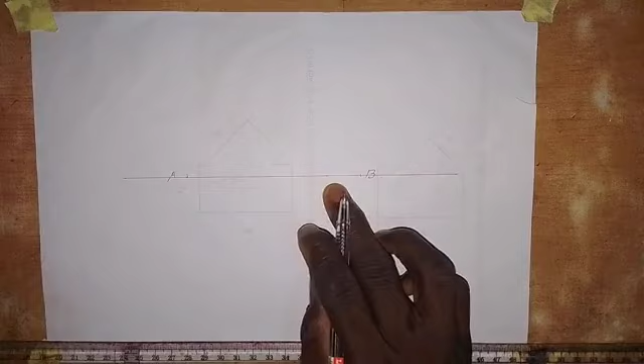So on this horizontal line, we are going to take a measurement of 105 millimeters. Okay, so this is 0.0, and then moving away, we have 105 millimeters here, which is also the same as 10.5 centimeters. So I'm going to label this point as point A on the line, and then label this point as point B on the line. So AB, 105 millimeters, is the diameter of the circle in which we are going to inscribe a heptagon or a seven-sided polygon.

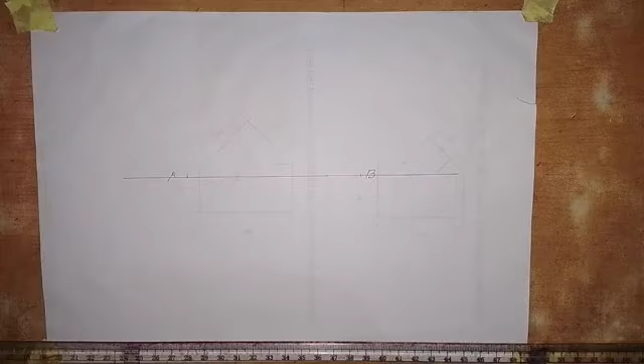Now the next thing that we are going to do is to look for the midpoint of this line AB, that is its middle point, because this line has an odd length, because the length is 105 millimeters. So to locate its midpoint, what we have to do is to bisect this line. So to bisect, we are dividing it into two equal parts.

Put the pinpoint of the compass here at point A and extend the pen point to a convenient radius more than half of the line to draw an arc up, and you draw an arc down like this. Okay, so with the same radius, pinpoint at point B, draw an arc up, and you draw an arc down.

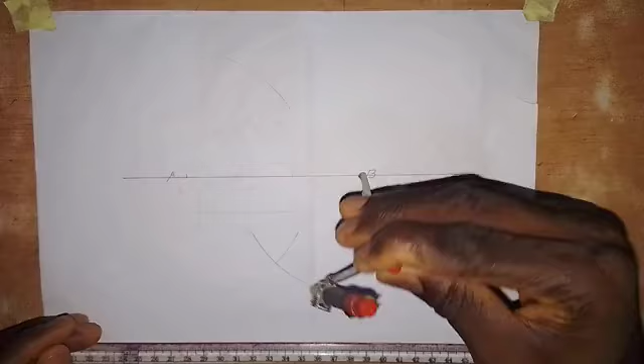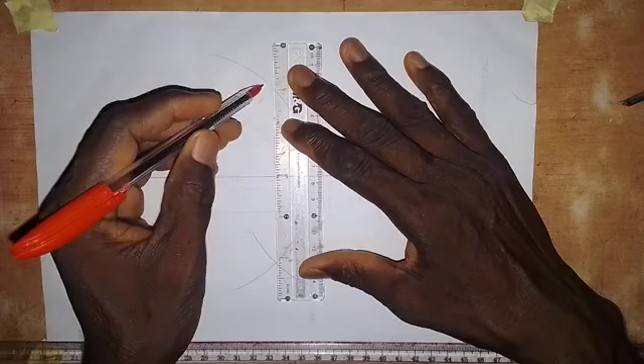All right, so now the next thing that you are going to do is to draw the bisector of line AB by joining the points of intersection of the arcs together with a straight line, and it goes like this. Just set your ruler like this and then draw this line. Okay, you have it like this. All right, so this is the bisector of the line. So let's call this point O here. So that is the midpoint of the line.

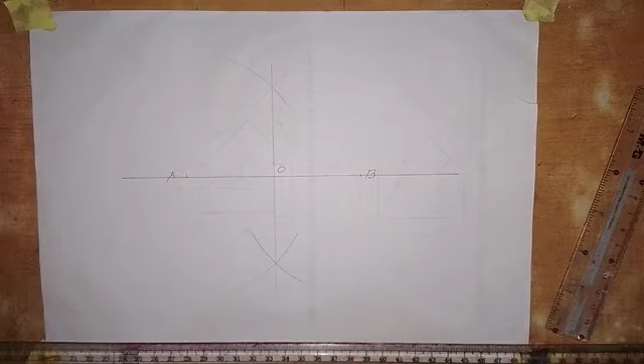Then the next thing that we are going to do is to draw the circle, now that we know the midpoint of the diameter of the circle, which is 105 millimeters. Okay, so we put the pinpoint here at point O, and then we extend the pen point to point B, and then we are going to draw the circle. It means the radius of the circle is OA or OB. Then draw the circle like this. Okay, so here we have the circle in place.

All right, so having drawn the circle, we are going to divide the diameter of the circle into 7 equal parts because we are constructing a heptagon. We are going to divide the diameter of the circle into 7 equal parts. So how do we do that?

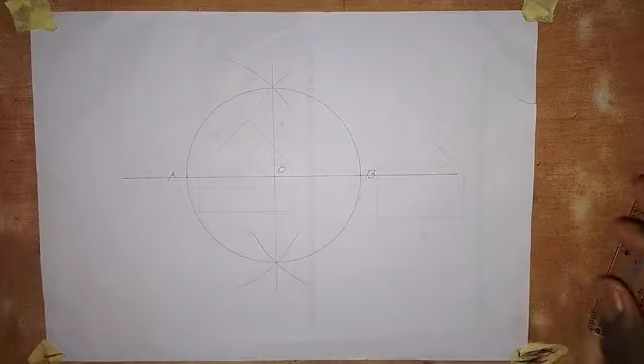So take your ruler and then set the ruler in this form, making an angle of 30 or a bit more than 30 degrees to the line. So from point A here, draw a line in this direction. Okay, so this line, I will call it line AC. So this is line AC.

Okay, then on this line AC, we are going to make 7 equal points on this line AC, so that we can divide this line AB into 7 equal parts.

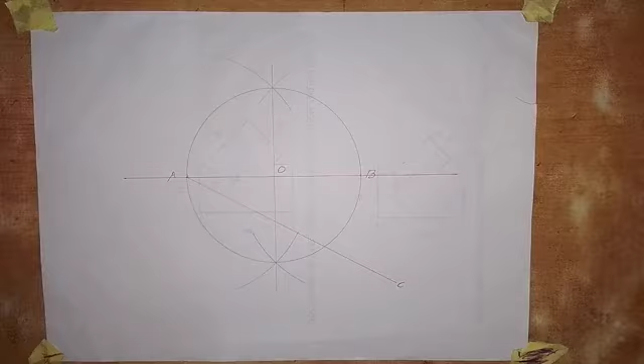Okay, so let's go and divide this line into 7 equal parts. I'm going to make use of this ruler, and I'll be taking a length of 15 millimeters each. You can decide on the length to take on your own. So you choose the length to use by yourself. So this is 15 millimeters here.

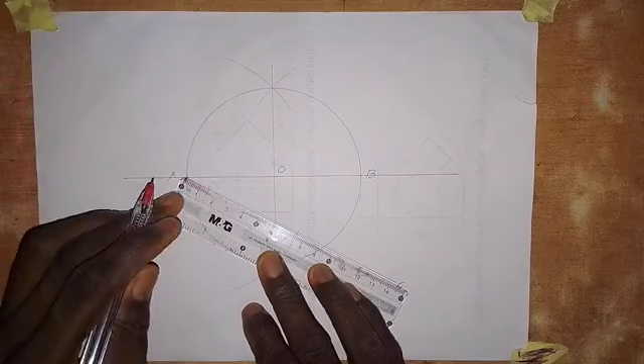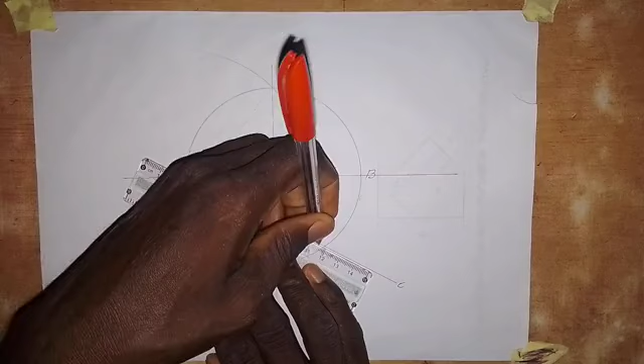Part of this ruler has been peeled off, so I'll just shift it here. And I will take 15 millimeters from here again. This is 1. Then I'll be taking the second one. This is 2, then this is 3, then this is 4, then here is 5, then here we have 6, then the last one, we have 7. So we have 7 equal points on this line.

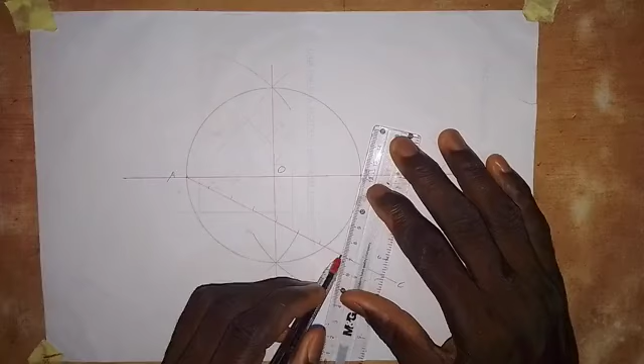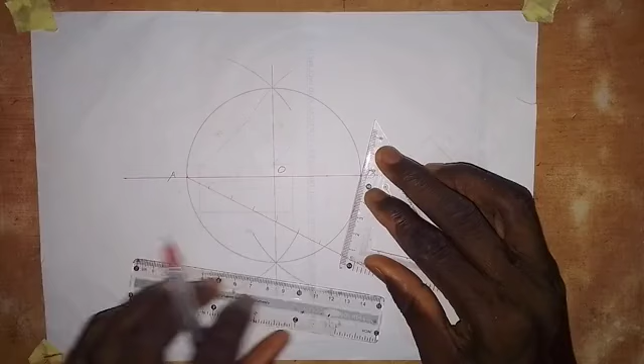So the next thing that we are going to do is that the last one here, we join it with point B, and it goes like this. So you join it with point B, then take your set square, set the set square along this line that connects the last point and B together. I'll put the ruler under it, then shift the set square to the next point without the ruler being shifted, only the set square moves.

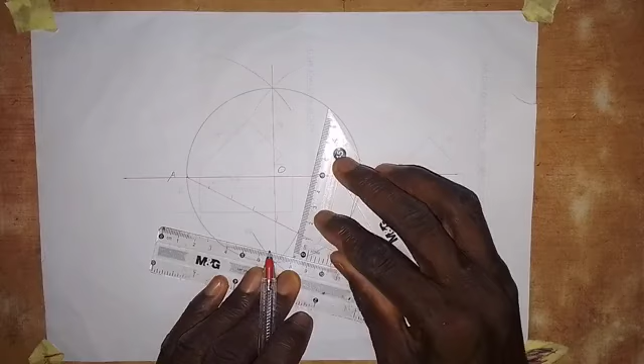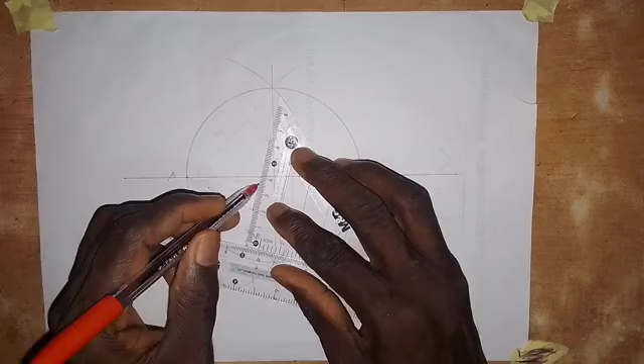So draw the line from here, then shift the set square to the next point again, then draw this line. Then again, shift the set square to the next point while the ruler remains unmoved. Then shift the set square to the next point again. Draw this line, next move the set square to the next point, draw this line, and lastly move the set square to the last point here and draw the line. So we have this.

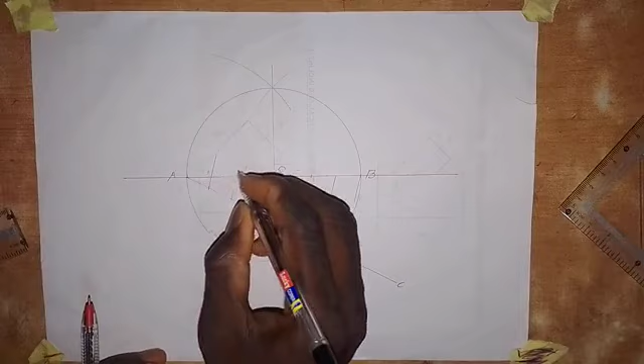All right, so we have divided this line AB into 7 equal parts. These lines here are parallel to each other. Take note of that. Now we are going to number the points on the line. This is point 1, this is point 2, this is point 3, this is point 4, this is point 5, this is point 6, and lastly this is point 7.

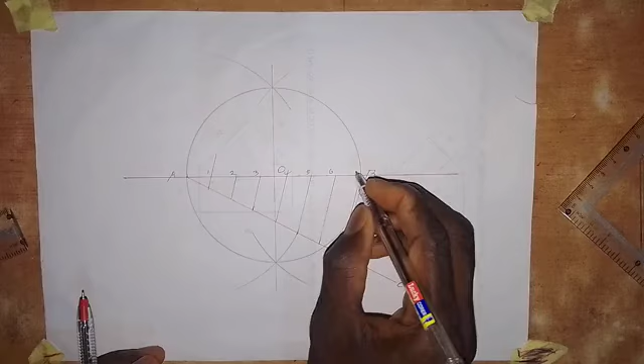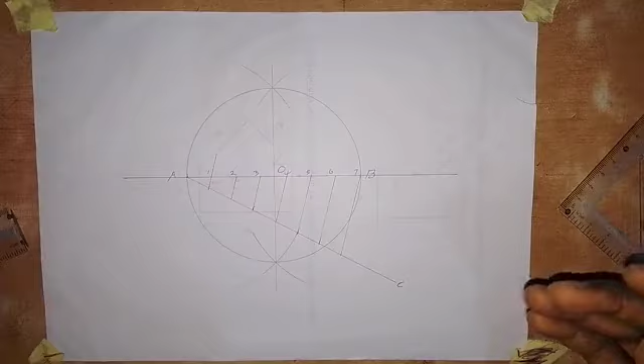So we've divided it into 7 equal parts because we are constructing a 7-sided polygon. If you are constructing a 5-sided polygon, you make it 5. If you are constructing a 6-sided polygon, you make it 6. And if it is more than 7, 8, 9, 10, you also do the same thing, making it into that number of equal parts. So thank you.

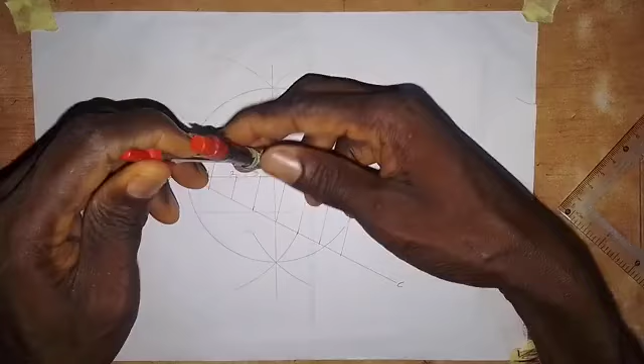All right, so the next thing that we are going to do now is that we take the compass, we put the pinpoint of the compass here at point A, and then we extend the pen point to point B like this, then you draw an arc that goes up like this, and also draw an arc that goes down like this.

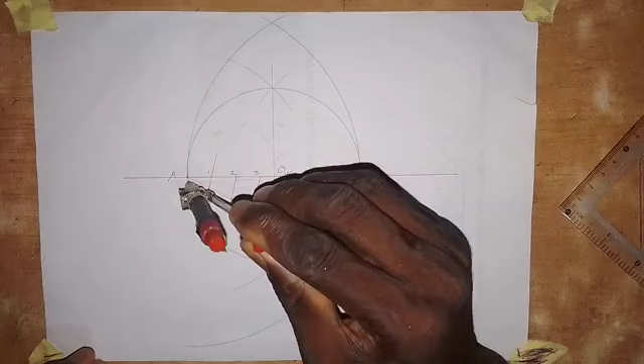All right, so with the same radius, put the pinpoint at point B, so it touches point A here. You draw an arc that intersects this arc here, and you also take it down, draw an arc that will intersect this arc here. So I believe you can see the two arcs as they intersect here, and we also have it here.

So let's call this point here point P, where the two arcs intersect here, and let's call this point Q, where the two arcs intersect here. So the next thing that we are going to do is this.

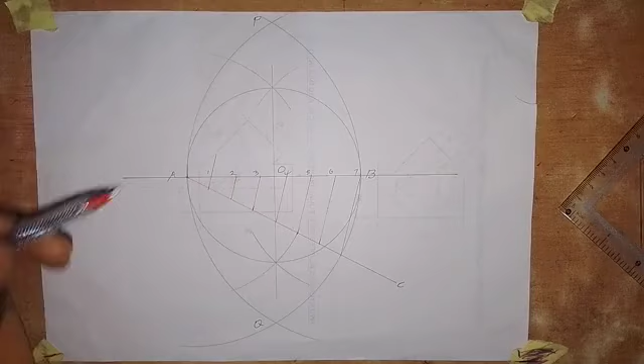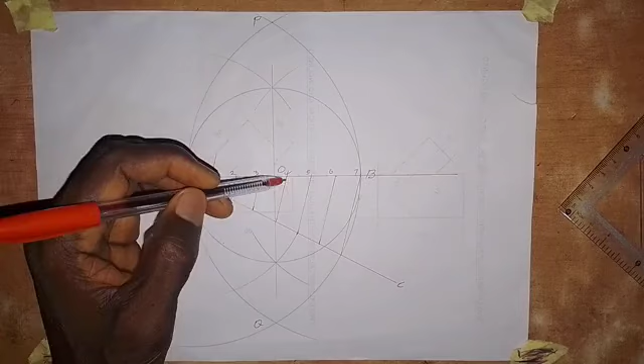Now we are going to be drawing a line from point P, passing through point 2 and touching the circle. We also draw a line from point P, passing through point 4 and touching the circle. We draw from point P again, passing through point 6 and touching the circle. So you do it for the even numbers. So for a 7-sided polygon, you make use of 2, 4 and 6. That is for a 7-sided polygon.

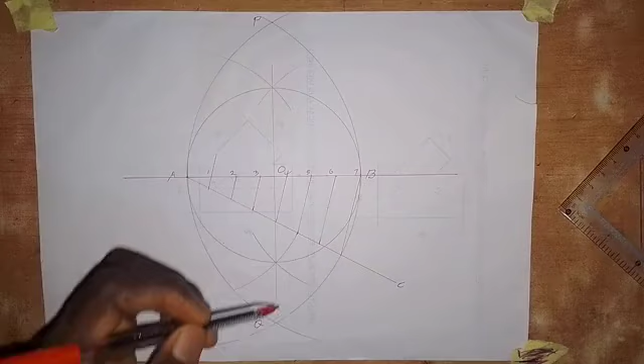And again, we are going to repeat the same thing, drawing a line from point Q, passing through point 2 and touching the circle here. Also from point Q, passing through point 4, touching the circle. From point Q again, passing through point 6 and touching the circle. With that, we'll be able to bring out the heptagon. Let's see how simple this is.

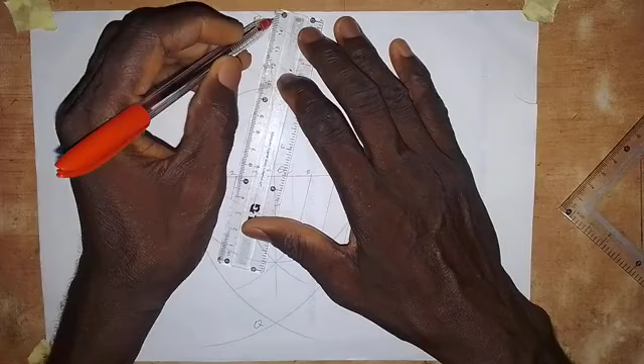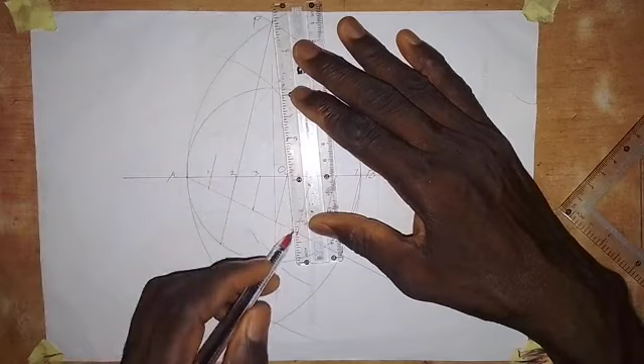Now, starting from here, set your ruler at point P and point 2 and draw the line like this. So it touches the circle at this point. And again, we draw from point P, passing through point 4. Set the ruler at point P, make sure you can see the point a little bit and point 4, and draw the line, let it touch the circle. It touches the circle here. So we have this point again.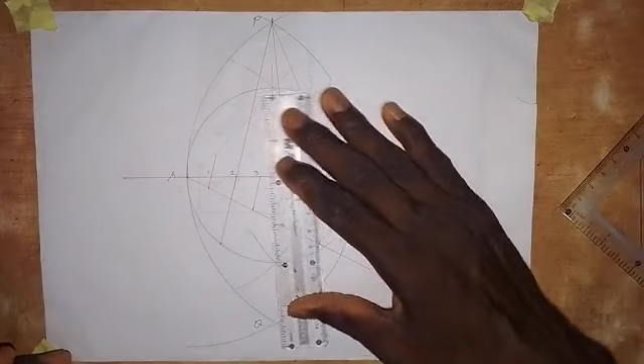Next, we also draw from point P, passing through point 6. So just draw like this and touching the circle here. So here we have this point. I can see the point clearly here. Next, we now take it from point Q, passing through point 2. Set the ruler like this, and then draw the line, let it touch the circle. So here we have this point.

Next we draw from point Q again, passing through point 4, so it goes like this. So we have this point on the circle. And then lastly we draw from point Q again, passing through point 6, and it goes like this, touching the circle at this point here. All right, so with what we have done here, we can bring out the polygon. So let's see how it goes.

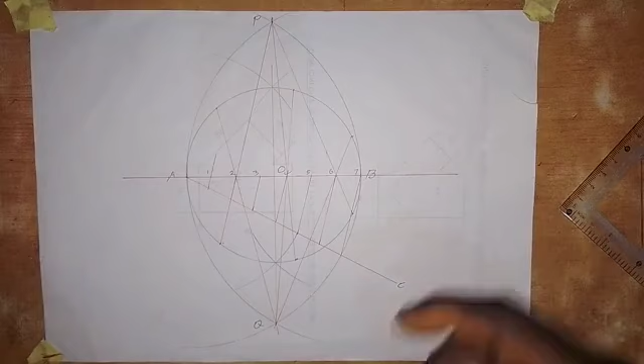So we are connecting. So let's label this point. So this is point D, and this is point E. This is point F. This point is point G, and this is point H, and this is point I. So apart from letter B and letter C, we have 7 letters: A, D, E, F, G, H, I. B and C are not part.

Okay, so we are joining these points together. Join AD together with a straight line. Then join DE together with a straight line, so it goes like this. Join EF together with a straight line, so it goes like this. And then join FG together with a straight line. Then join GH together with a straight line, so it goes like this.

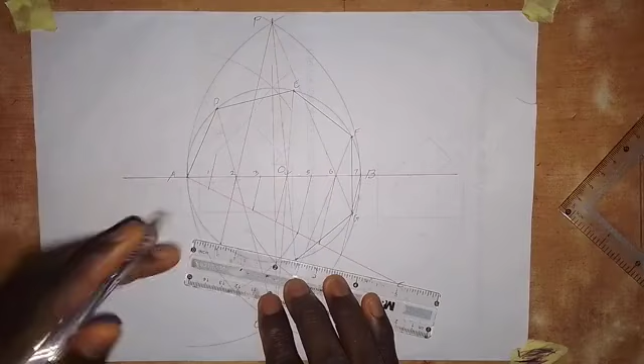Then join HI together with a straight line, and then you join IA together with a straight line. So we have a 7-sided polygon. So this is a heptagon which is constructed in a circle of diameter 105 millimeters. As simple as I've done it here.